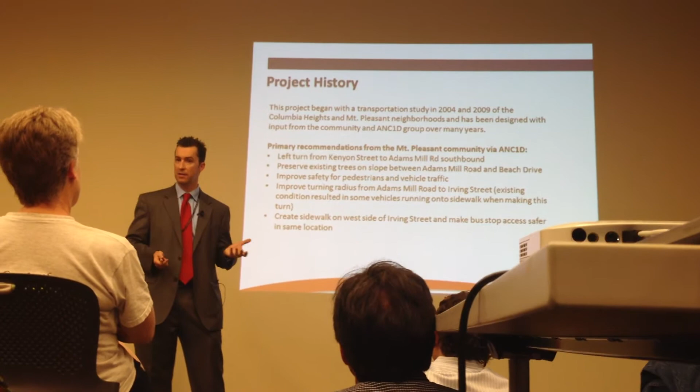Some of the primary goals of the project - so we wouldn't just come out and address one thing, this is an opportunity to make the entire intersection safer. Safer for vehicles, safer for pedestrians, improve the lighting, high visibility crosswalks, ADA ramps so that it's compliant for ADA, plant trees, the addition of bike lanes. These are things that DDOT would look at now in a roadway project to make it better for all of the users of the intersection.

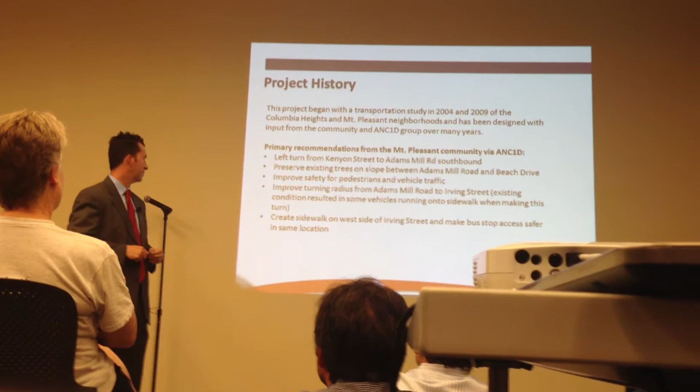DDOT understands that we cannot design projects in a vacuum. If we take our projects from planning and go right to final design and don't consult with the community, then we won't have a win-win. We don't live every day in that intersection or that corridor, so we need to hear from you.

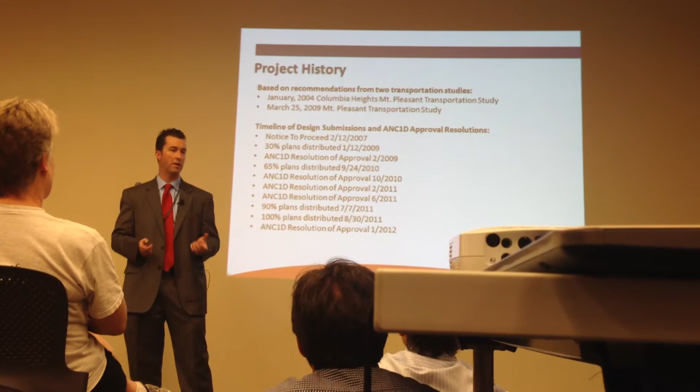The way that we do that, there's two ways. We rely on the ANCs - they're our conduit, that's how we hear from the community for special concerns, special requests. You may recall the traffic barriers, the temporary barriers that were in Irving, blocking on the west side - that wasn't appropriate, that was unsafe, and that wasn't a permanent fix. One of the things we worked with the ANC on lately was a coordination of the addition of a sidewalk and the location of the bus stop.

There are two ways we work with the community. First, every time we reach a major milestone, we send our plans to the ANC commissioners. Major milestones are 30%, 65%, 90%. I'll admit it's hard for everybody to understand engineering plans, so DDOT offers to visit the ANCs and go to community meetings, which we did. We went to 5 of them, as evidenced by resolutions from 2009 to 2012. These are times when the ANC said, thank you for submitting your plans to us, we understand enough to provide a resolution. This is an indicator to DDOT that we've coordinated effectively with the community.

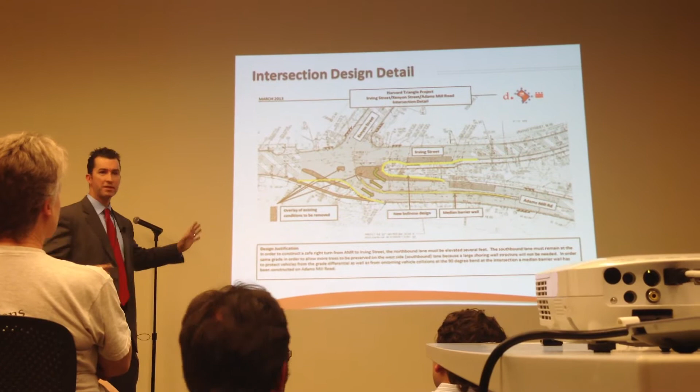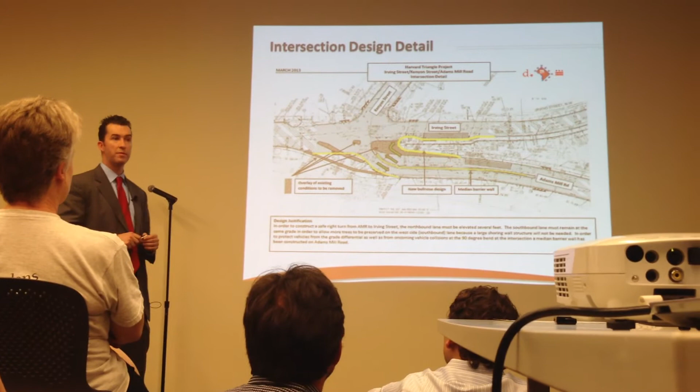I'd like to show everybody how the intersection was reconfigured to be safer. The brown hatching represents the old medians, the old configuration. It was quite easy for southbound traffic to use a chute here and continue right through your neighborhood to points south.

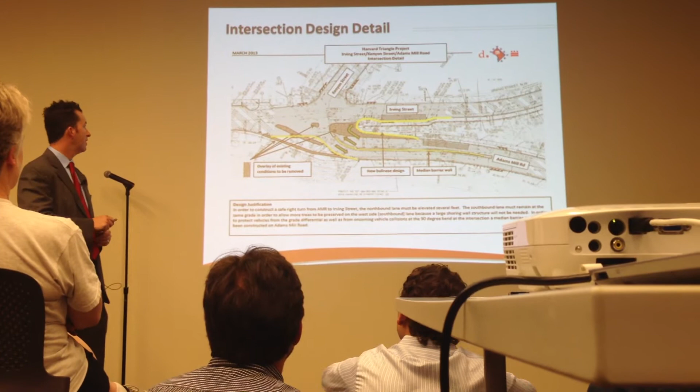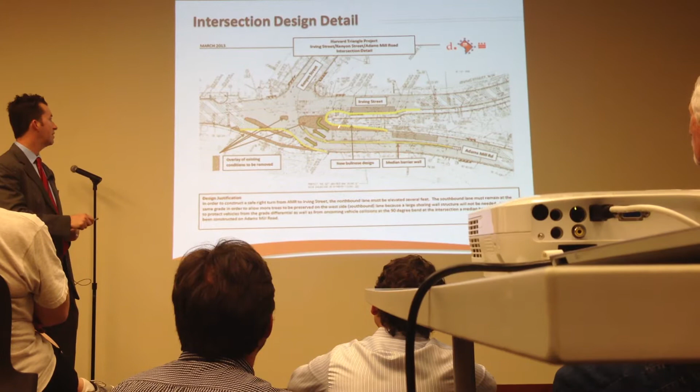The left turn could not be facilitated for Kenyon westbound because of this median. They were shortcutting through the alley, which is a very dangerous condition, and U-turning here. This is the location where the right turn was a problem - this was too tight, the radius was 7 feet. That's where our study suggested making an improvement.

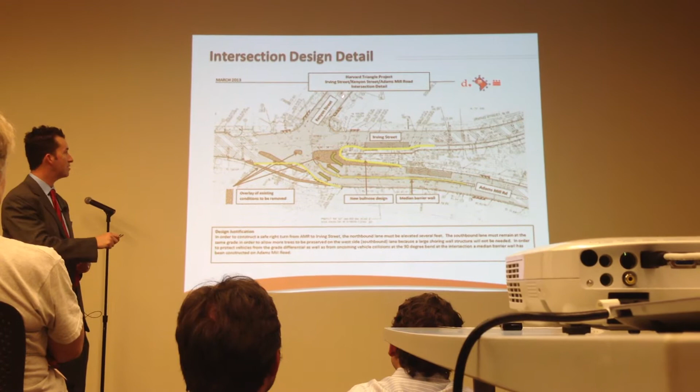The squaring up of this intersection is what makes it safer. The westbound drivers on Kenyon - you can see the center line of the road labeled here - shows how the vehicle will drive westbound and then make a fairly easy-to-navigate left turn, as opposed to anything that was illegal before.

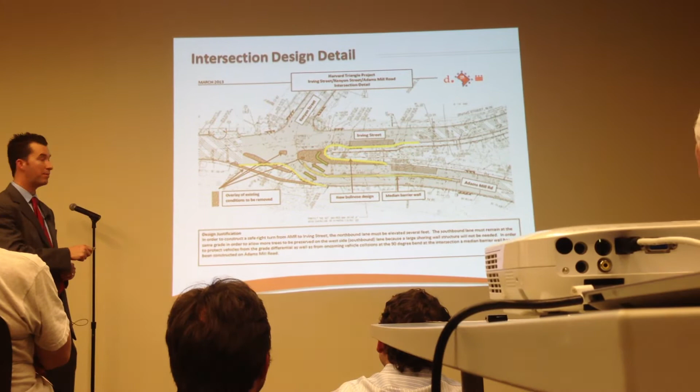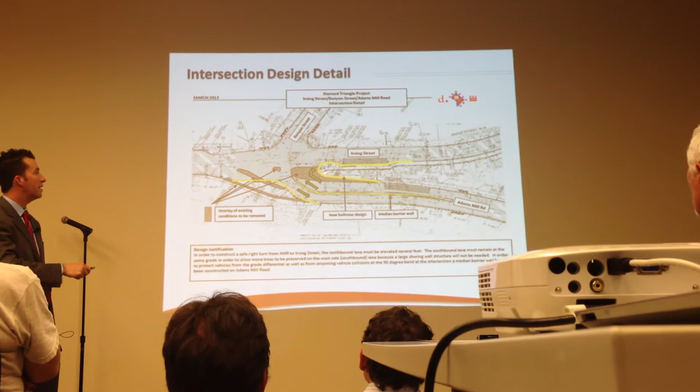What I want to focus on is the yellow lines. In squaring up the intersection, there's a shift south, and that shift is important. It facilitated the left turn, but once that happened, we didn't want to pull cars way out here and make them hook back. We had to make this as safe as possible, which meant the right turn movements and straight movements to Kenyon, and also northbound to Adams Mill, had to occur in the space I refer to as the bullnose.

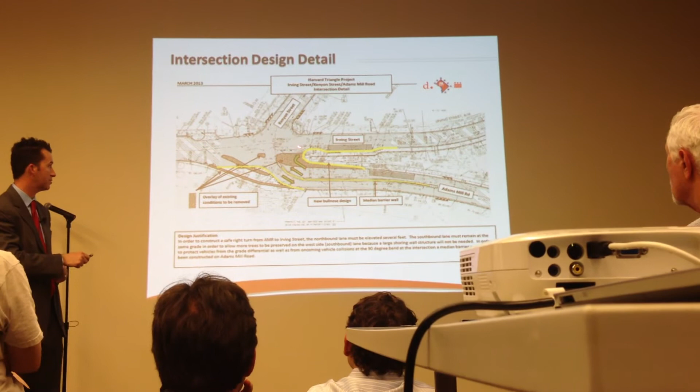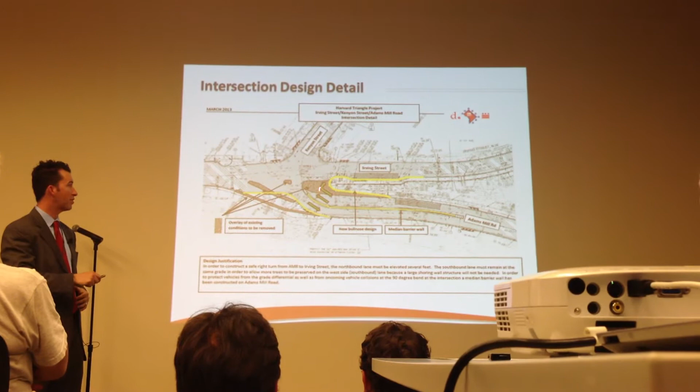That's the area where trees have recently been cut. In this aerial view, we had to pull that back - this is where the stop bar is going to be for cars turning right on Irving.

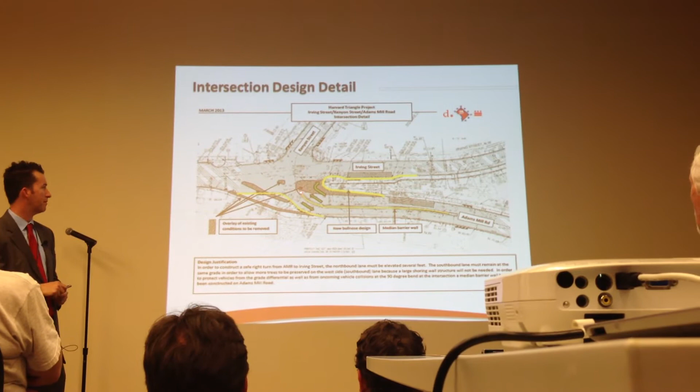Another point I'd like to make right now - let me go to the next slide.

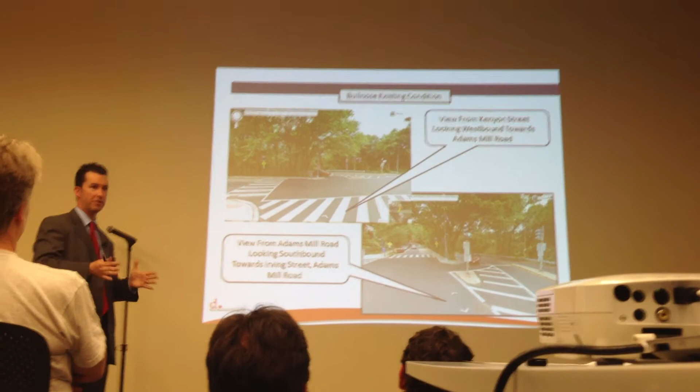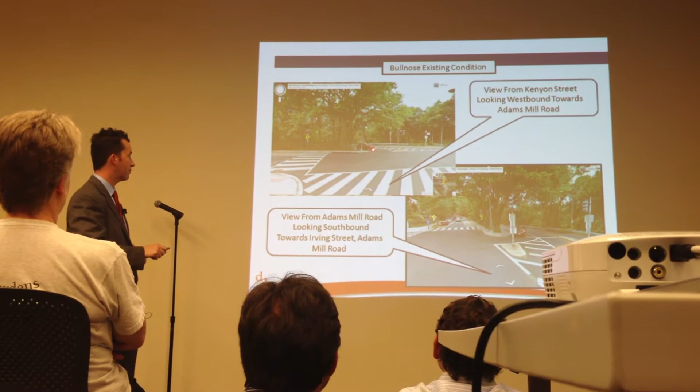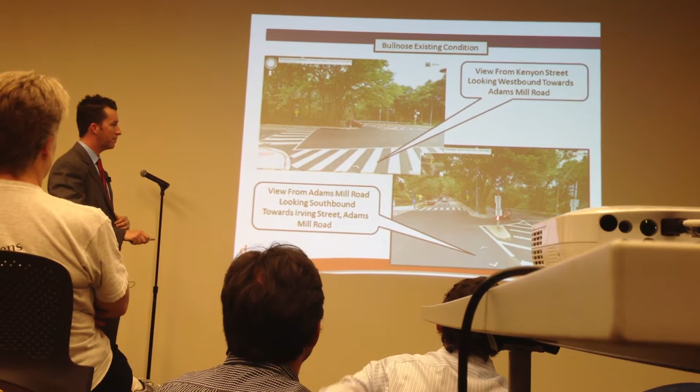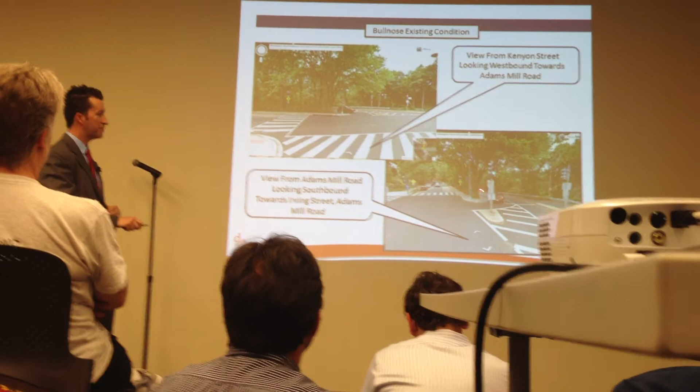Once we settled on reconfiguring the geometry in an XY coordinate space, or the plan view, we had to figure out how the vertical tied in. As you can see, the right turn used to occur here where the red car is shown - this is Irving, looking down Adams Mill and Irving. The car here, when asked to stop at this position, shows a vertical difference from Irving because it's on an increasing grade, and Adams Mill is on a downgrade.

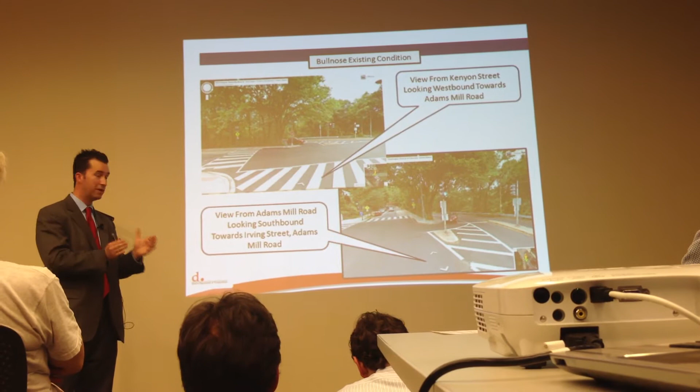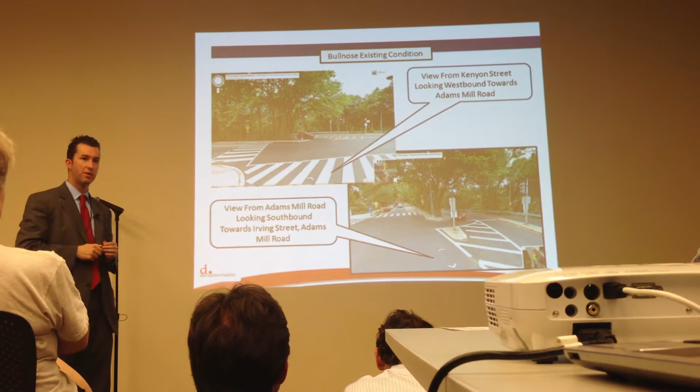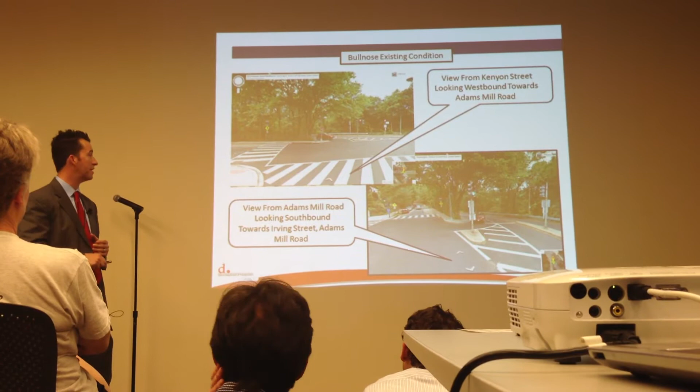This is the vertical difference that had to be made up, so it all works in order. The left turn first, which we needed to move, then the right turn movements happened in the bullnose because Irving was higher than Adams Mill. We had to raise Adams Mill - what we first proposed was to raise all of it. One option would be reducing the grade on Irving, but that would have impacted retaining walls and homes. We have very tight right-of-way here, and we're also challenged by the topography.

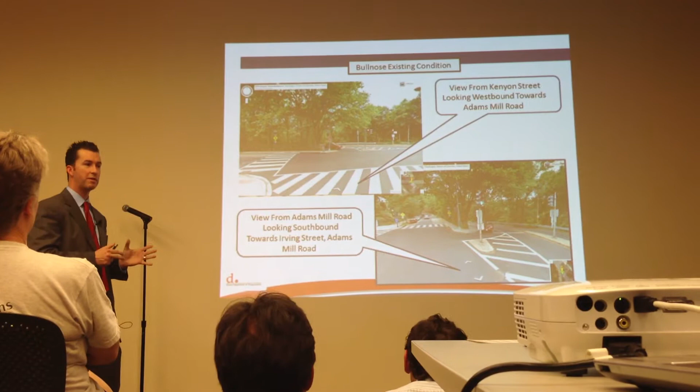There's a drop-off here to Beach Drive, so we have very limited real estate to work with. So I hope I've got the point across of why Adams Mill had to raise, if we're matching grade here for right turns on Irving.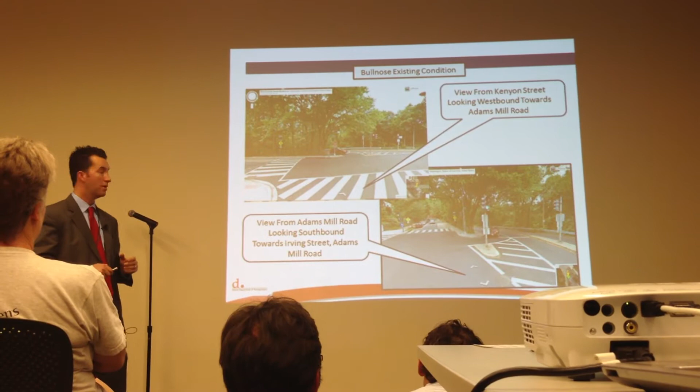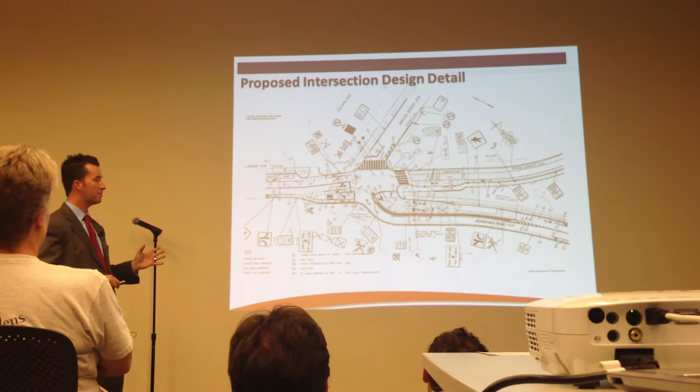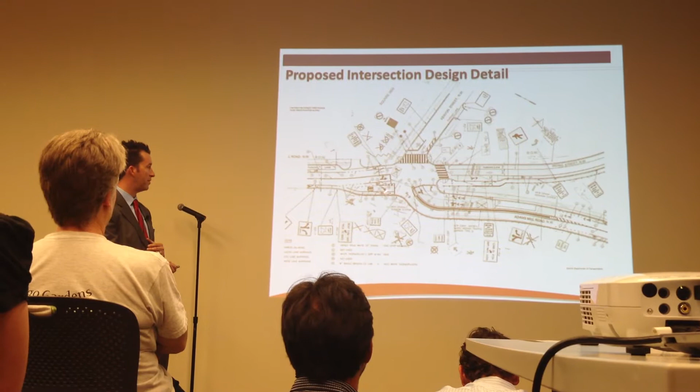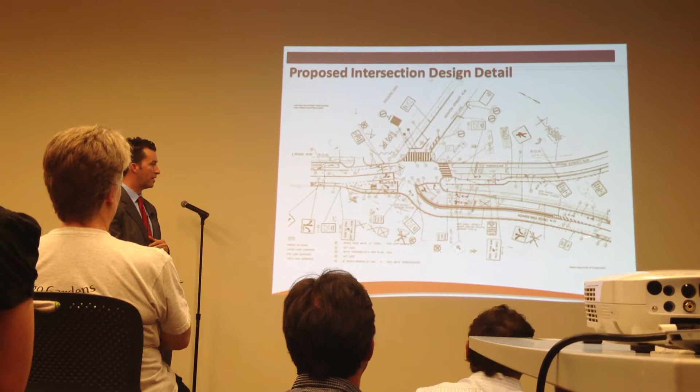Next slide, please. This is an image of the final pavement markings for the project. I'm just putting this in here so you can see what the ultimate product will be. Stop bars here - no longer just a quick chute down to Adams Mill, you have to stop. You're kind of at a 90-degree turn, which is safer. There's a stop bar for bicyclists here, also a bicycle lane that continues on to Irving. We do have full bicycle lanes added here. There's a shadow condition at the intersection, and high visibility crosswalks.

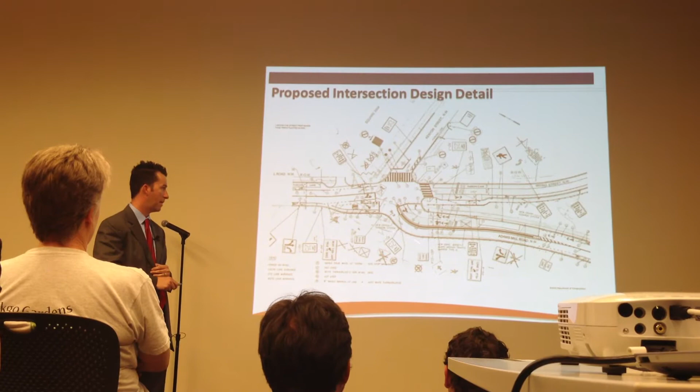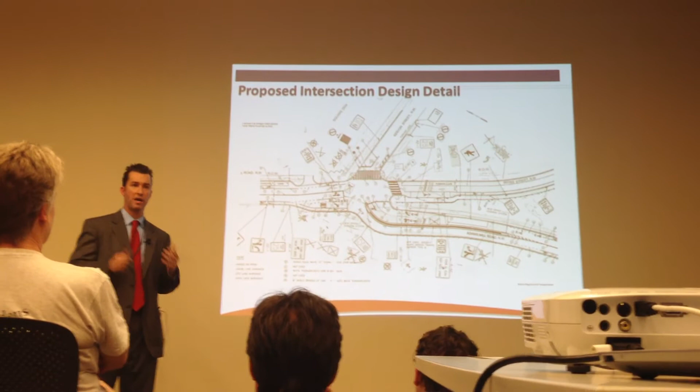So this gives you the impression of what the intersection would look like with its full safety improvements. I had talked earlier about the need to raise northbound Adams Mill to match into Irving. What we first proposed was raising the entire street, Adams Mill southbound and northbound, and we had a wall out here. That was in our 30% design, and that was also in our 65% design. At that point, DDOT's feeling like we're moving on to 90%, we're pretty close to having this completed. It was at that 65% review that we met with the ANC and we were asked, can you do something better? Because when we were to build this wall, we were raising the roadway 3 feet.

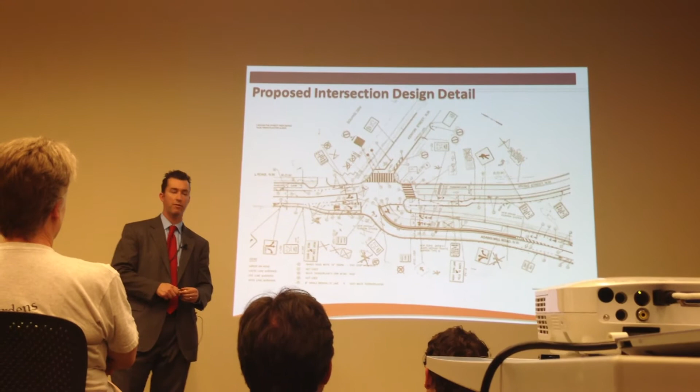The wall has a footing, probably about 12 feet wide, that has to go 3 feet into the ground because it has to be below the frost line. That would impact all of the trees on this slope, including the significant 52-inch red oak and all of the smaller trees that provide a green buffer as you're driving down southbound Adams Mill. We looked at it - I'll be honest, there's hesitancy when design has progressed to a certain point and you have to go redesign. But DDOT felt this was a place where we could get a win. We asked our designer, we gave them an extra task order to redesign this.

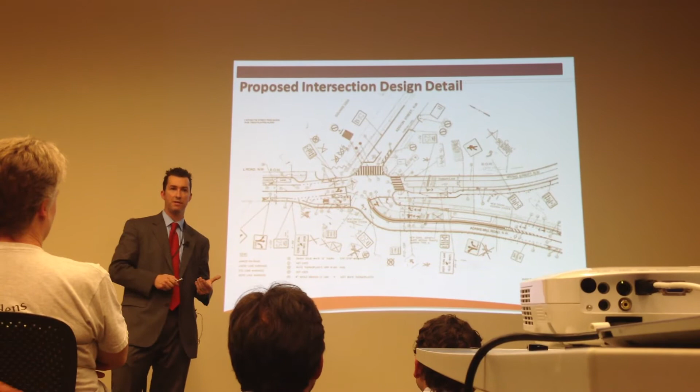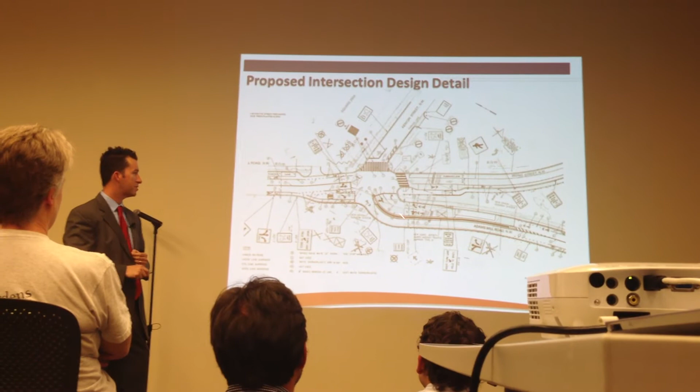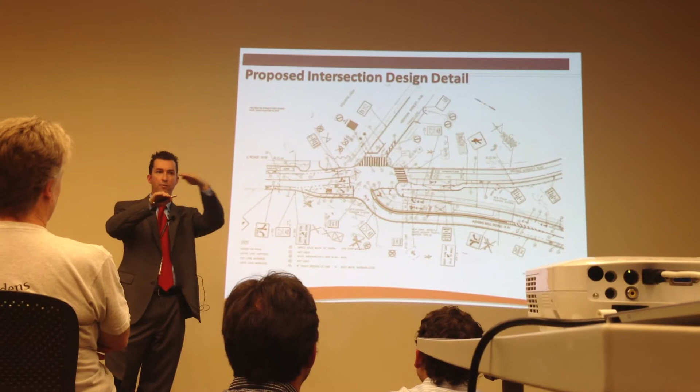And that's where the idea for the median wall came up. That's what we came up with - the idea of the median wall. So essentially, we moved the wall. This is a 200-foot wall. 200 feet of impact along the tree line was moved to the median. And now we've staggered - we still match in at northbound Adams Mill like we needed to, but for southbound, we were able to have it stay on the existing grade.

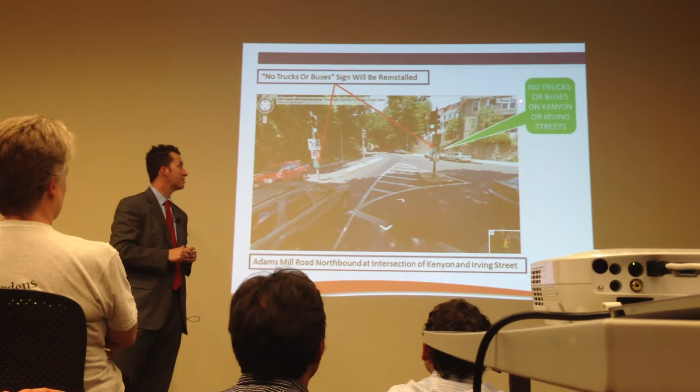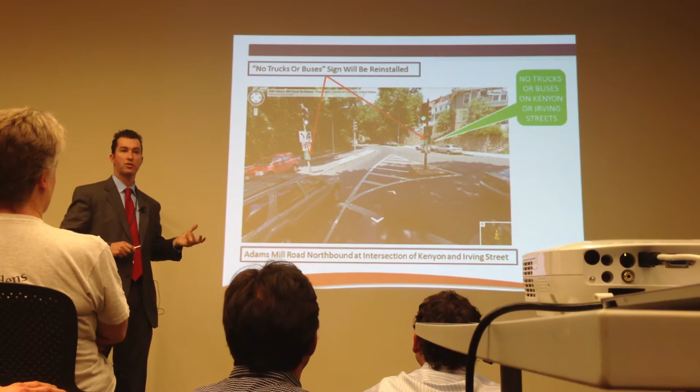Next slide, please. There have been some questions about the no trucks or buses signs. They were out there in the existing condition. One of the things I want to make sure is clear is that everybody knows these signs will be reposted, and I can offer an explanation on that. The radius for the right turn was 7 feet.

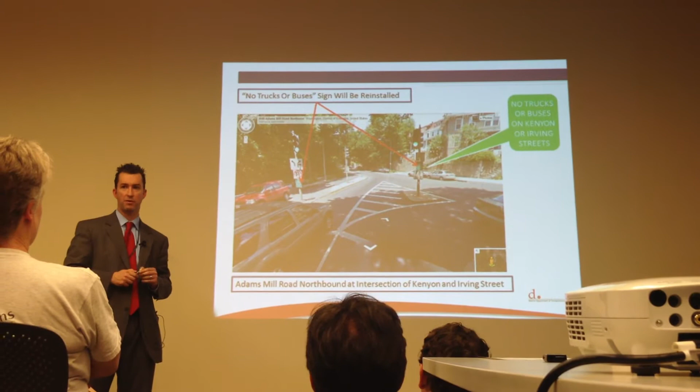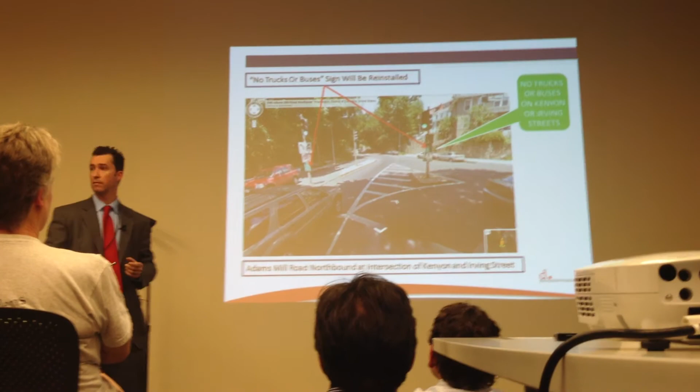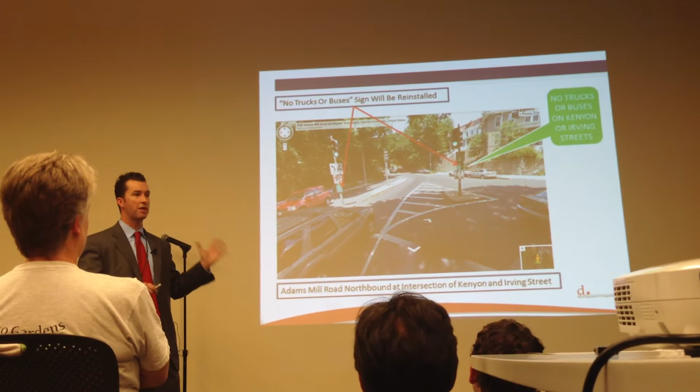National Design Code requires for passenger vehicles 13.8 feet. We were able to achieve 14 feet. We would have preferred making it safer for any and all vehicles, but because of the very tight right-of-way, the best we could do was 14 feet, which is acceptable for passenger vehicles. So these signs will be reposted. It's because the intersection is safer, but it's not safe enough for the long semi-trucks that you see on the freeway - they can't navigate the U-turn there. The other thing I'd like to point out is DDOT does not anticipate any increase in truck traffic as a result of this project. There's nothing we've done here that says, please begin using this as a main trucking route.

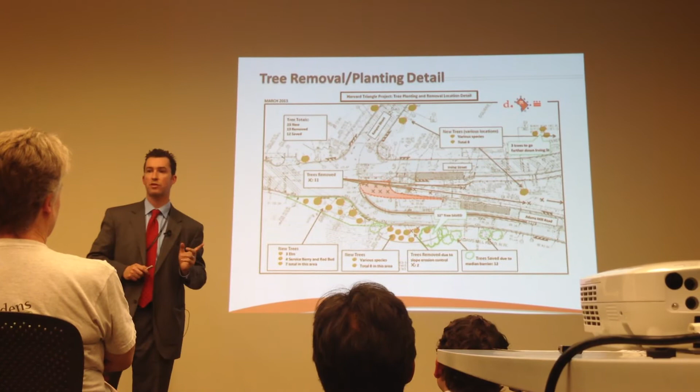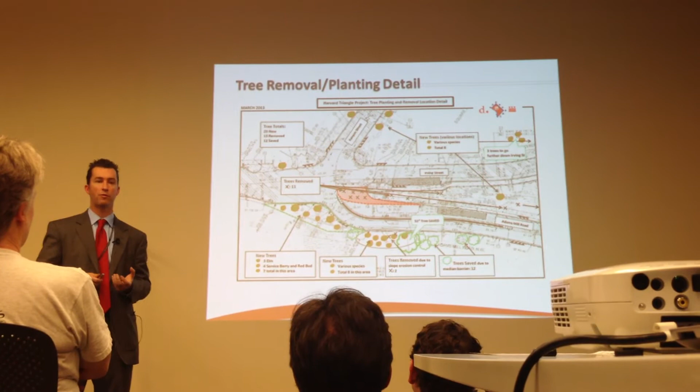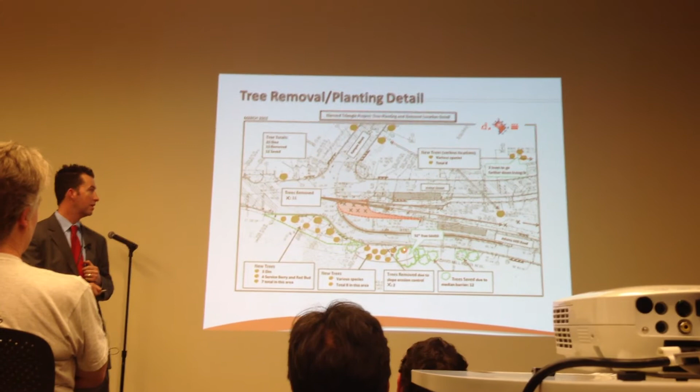Next slide, please. I'd like to take a minute to address the trees. Increasing the tree canopy is a primary goal of DDOT. Our Urban Forestry Administration is tasked with overseeing that, and they're doing a wonderful job. They were involved with this project and were very excited when the median wall concept was proposed, and we salvaged the 52-inch tree and trees down the slope. One of the things that we did do, and it was raised earlier, is all of the trees that were in the bullnose had to be cut.

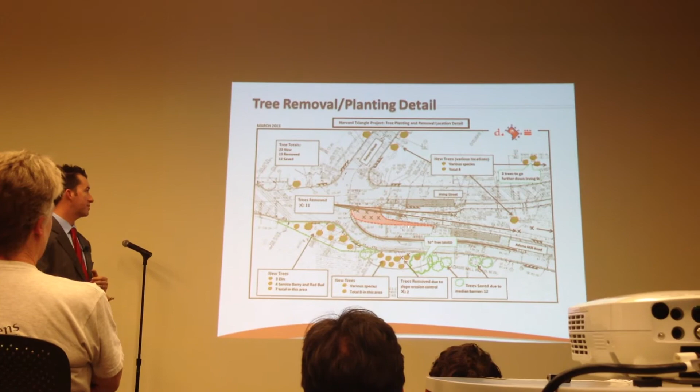That's where we proposed the new location for right turn and through vehicles from southbound Adams Mill to be stopped. These trees have been cut. There are 3 more proposed to be cut along this slope. One is down here, what we call a head knocker, with a new sidewalk being placed - it's too low. There's another one here that has to be removed to facilitate construction to improve the bus stop.

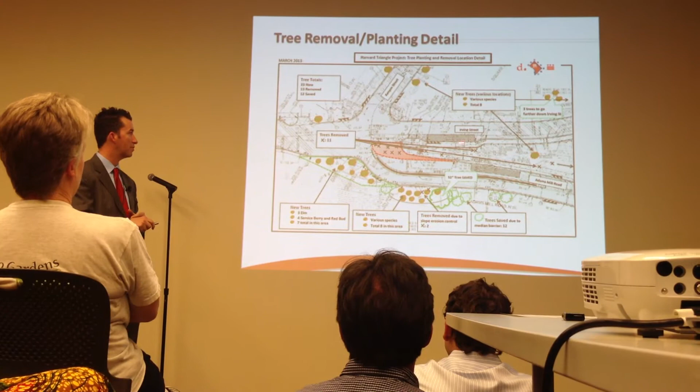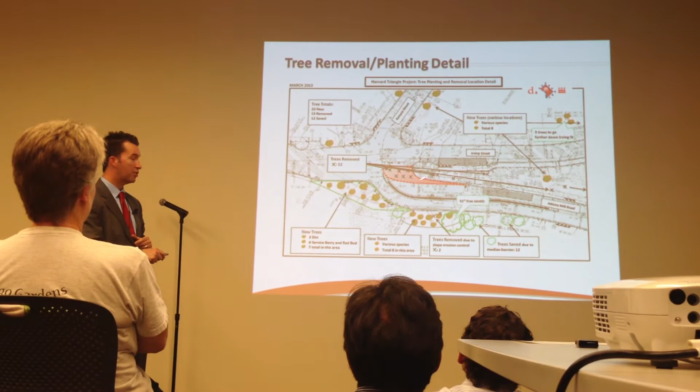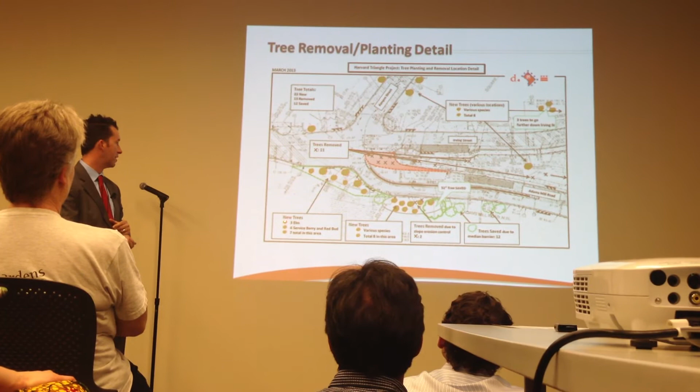So let me first say, approximately 11 trees, exactly, are removed here. Even though we took the bullnose, we had the advantage of creating new green space. This used to be the asphalt road for southbound. In that new green space, DDOT is planting 7 total trees - 3 elms, 4 serviceberry and red buds over here.

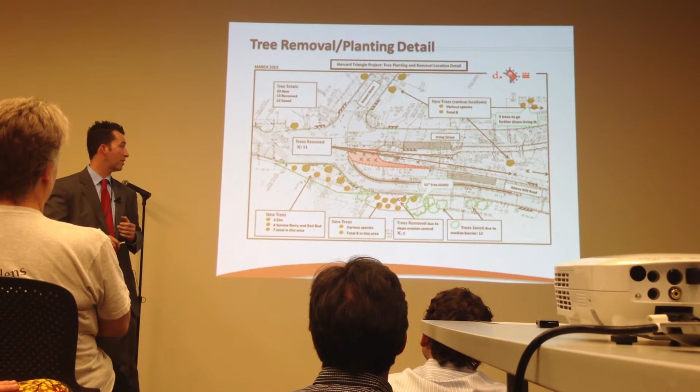Then you have a surprise issue right here. When we got to construction, we saw there was an erosion problem due to runoff. There are deep gullies formed on the slope. We've been in consultation with the Park Service, and they were excited that we were going to address the erosion problem as part of this project. In doing that, there are 2 small trees here, north of the 51-inch red oak, that will have to be cut as we restore the slope, and then we will be planting new trees, 8 total, along that slope.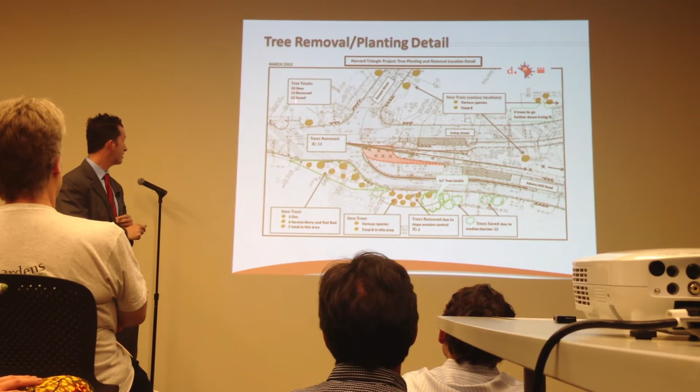The net gain, 23 new trees... 20, that doesn't look right. I believe that's 13. Is that right, Tom?

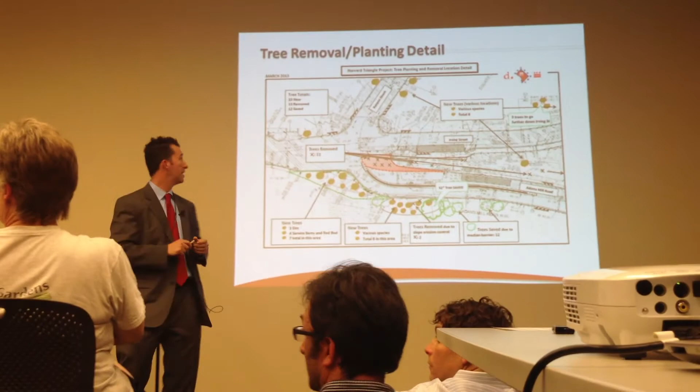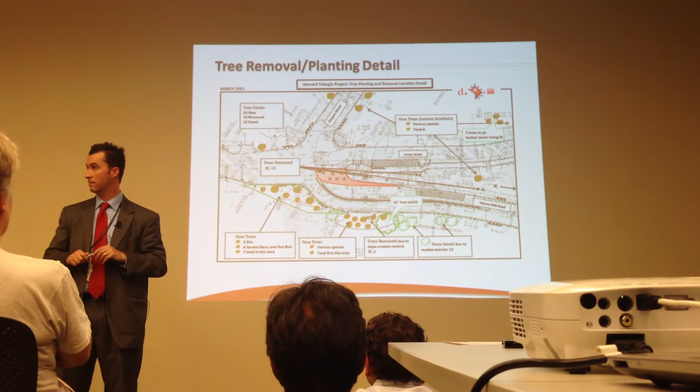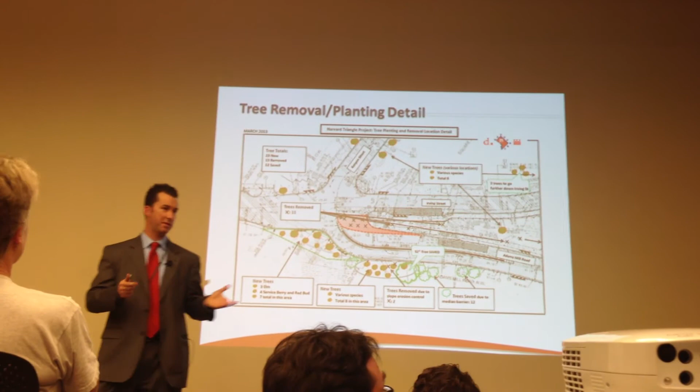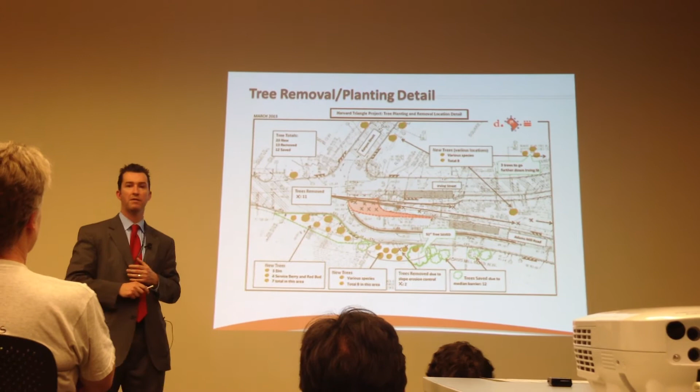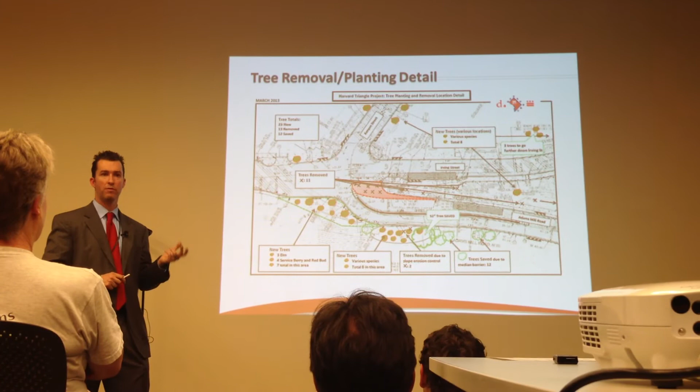Okay, and I apologize, let me repeat. With the removal of trees and then the planting of new trees - and I also wanted to point out, most of the trees that were here in the bullnose were not native, they were invasive species. The trees we are planting are native species, 2 to 2.5 inch caliper, and there's a net gain of 10 trees: 13 removed, 23 replaced. The 12 we've noted saved here are the 12 that would have been impacted should we have placed the retaining wall out here along the park edge. Next slide, please.

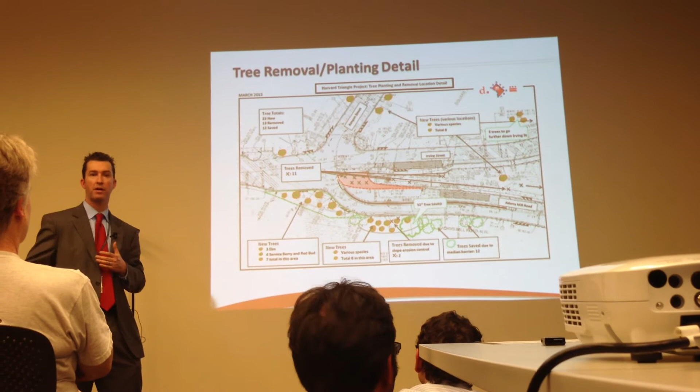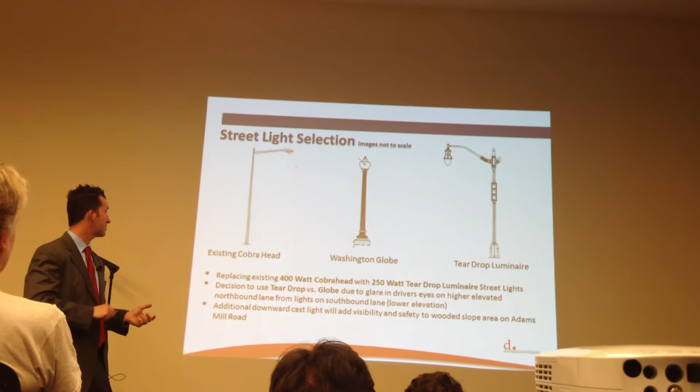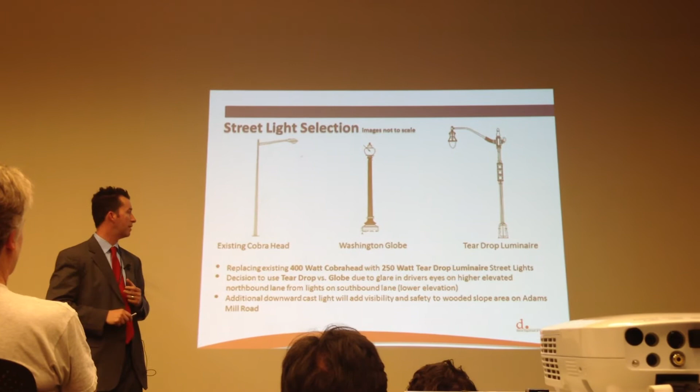We were asked about the lighting that was selected for the project. The existing lighting on Adams Mill is Cobra Head, a standard that DDOT uses, and we would be okay with placing that standard there because it's something we use and it's acceptable. The Washington Globe, because of the historic neighborhood and the zoo, is something we looked at to apply along Adams Mill. The issue is that with the tiered nature of the northbound and southbound, when the Washington Globes were placed on the southbound side, which was lower, the globes glow very bright and become an issue for drivers - the glare, they're blinding. And so in order to maintain the minimum lighting requirements for our streetlight policy, we couldn't place Washington Globes.

We did not feel it was acceptable. We needed a higher mast arm light. We didn't feel the Cobra Head, which is on Adams Mill, was acceptable. I know it does not match what's out there, but DDOT felt this was the more appropriate standard to use, giving us the mast arm, the higher elevation, and a historic nature. So these are the lighting standards that were chosen. At the intersections, these are the lighting standards DDOT customarily uses because it gives ample lighting to the crosswalks. It's very important for us, whether it's a streetscape project or a new intersection improvement, to improve lighting for pedestrians crossing at intersections. This is the primary way we make that improvement, with the high lighting. Next slide, please.

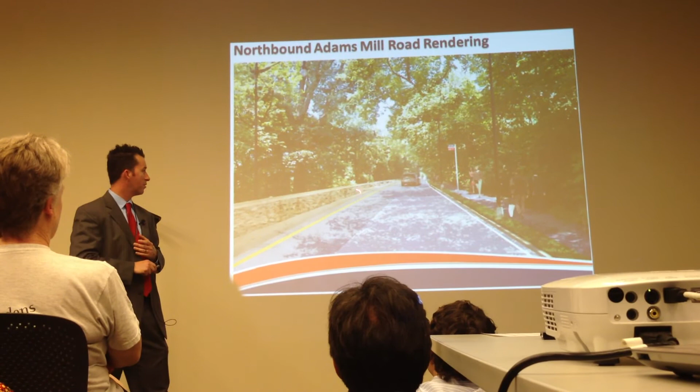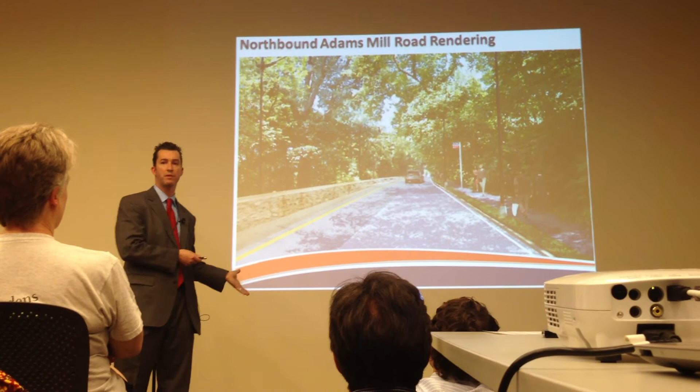The reason the wall was needed is there's a barrier here, and I hope it goes without saying, there's a 3-foot drop on the other side of this wall, and vehicles have to be protected from that drop. A second reason is we have a nearly 90-degree turn up here as you approach Kenyon and Irving. The Jersey-shaped barrier is the safest barrier, which is what DDOT selected for safety reasons. Energy is dissipated for low-speed impacts, and it's also the best protection for high-speed impacts.

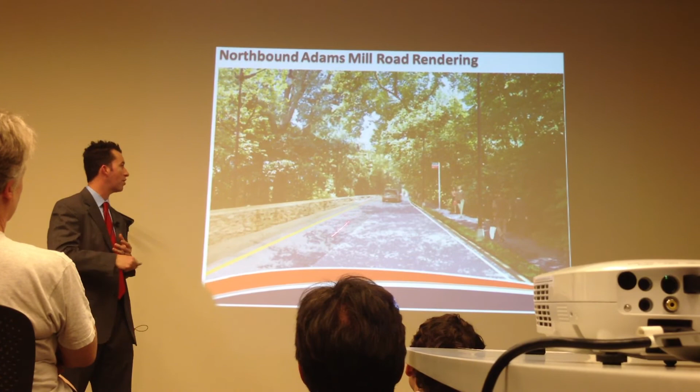We all know reasons why vehicles may collide with this barrier: distracted drivers, impaired drivers, there's even driver memory—folks who don't recall a turn at the end of this. We have a duty to make sure southbound drivers are protected from crossover.

Next slide, please. This is the view from southbound Adams Mill. The wall is much higher here—it's 3 foot, 34 inches for the protective barrier, along with about 3 foot for retaining wall height. We're also proposing, as a result of hearing from the community, to provide a stone facing on this wall.

This is the side, the ridge if you will, where Beach Drive is down here. This is the historic tree, 52 inches in diameter, a red oak, but this is the other growth in the canopy that we heard from the ANC was worth protecting. This is the two-tiered approach our engineers came up with. We felt it was going to be a win, and we still feel it is.

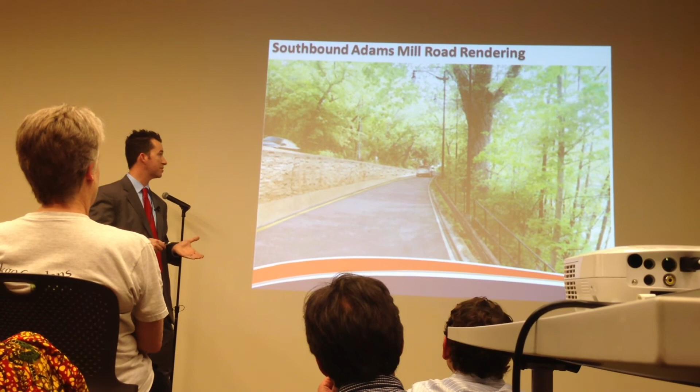Being a project like this, any project DDOT does today, we can't just come and take right of way at will to make a perfect intersection. A DDOT project today involves a lot of trade-offs and a lot of input, and what we're seeing here are trade-offs that affect everybody. There's safety, there's an aesthetic improvement, there's environmental sensitivity, there's a left turn, and in other parts of the project there's the sidewalk to the bus stop at Irving, there's bicycle lanes further south from here, and this is a sharrow here.

So, at the end, DDOT looks at the big picture of the net gain for the community, and this is what we're proposing to mitigate. We're sorry it came to this for many people, but we're hoping this would be pleasing and allow the contract to continue. Just to let you know, we were supposed to finish in September.

We're still on track for being done in September. Our contractor is on schedule, we're on budget, and we would appreciate hearing feedback quickly if the community is amenable to this concept, if there's special stone you'd like to request, or other things we need to work out. We want to hear from you.

Next slide, please. The last thing I'd like to close with: Thomas Pipkin is our community outreach representative. He's very responsive, in charge of working on our project's website, responding to any questions, and directing questions he cannot answer to my attention. So, we promise to be responsive.

And with that, I've concluded my presentation. First, I would like to thank all of you for your attention. I hope I didn't confuse you with any of the details. If you require any clarification, let me know. But I'd also like to take this time to field questions.